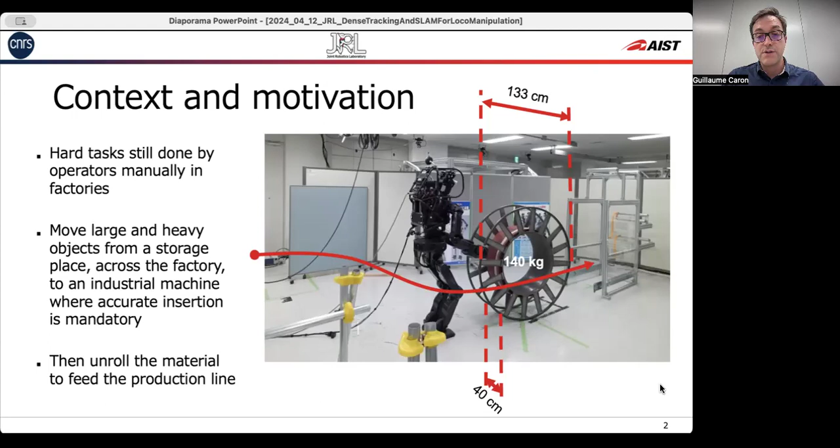It's a challenge to manipulate with the humanoid robot chosen here because of its similar shape to the human operator in today's factory. The goal is, after moving this big object in the factory, to insert it in the industrial machine, which is more or less the same width as the object. That's why accuracy is important.

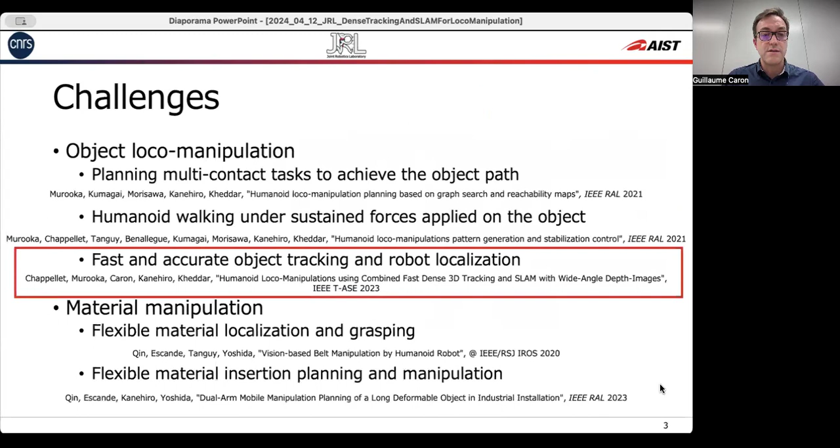There are many challenges to achieve these tasks in the two parts of loco-manipulation and material manipulation. Our group made several contributions to these issues, and today I'm focusing on the fast and accurate object tracking and the robot localization issues.

First, we chose a recent sensor, the Azure Kinect camera, which offers a wide-angle depth camera with 120 degree field of view. This camera is set in the head of our humanoid robot, and the data captured is used for both 3D model-based tracking using the dense depth map, and its interplay with SLAM for localization and mapping, using both color and depth information.

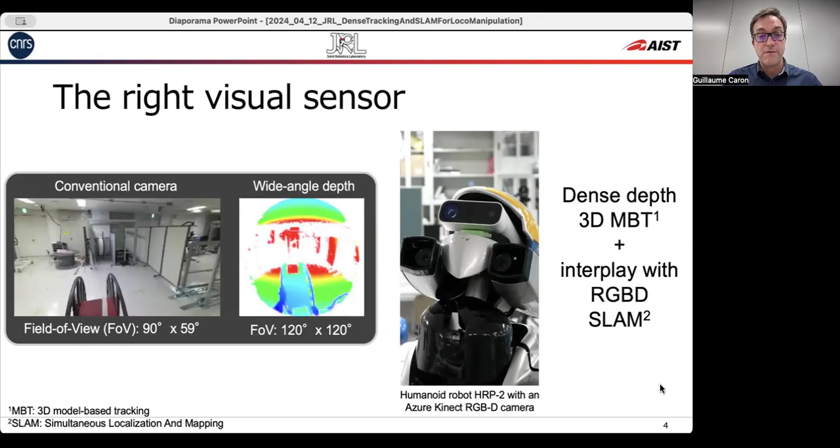The 3D model-based tracking aligns the 3D model of the object to manipulate with the depth map captured by the camera. This is done by solving an optimization problem that minimizes the error between the two types of data.

It is done in a multi-scale approach, and at each iteration there are three stages. First, the 3D model is projected onto the same plane as the depth map to do dense point association. From these correspondences, we compute the rotation and translation between the 3D model and the camera. At convergence, the alignment between the 3D model and the captured depth map is ideal.

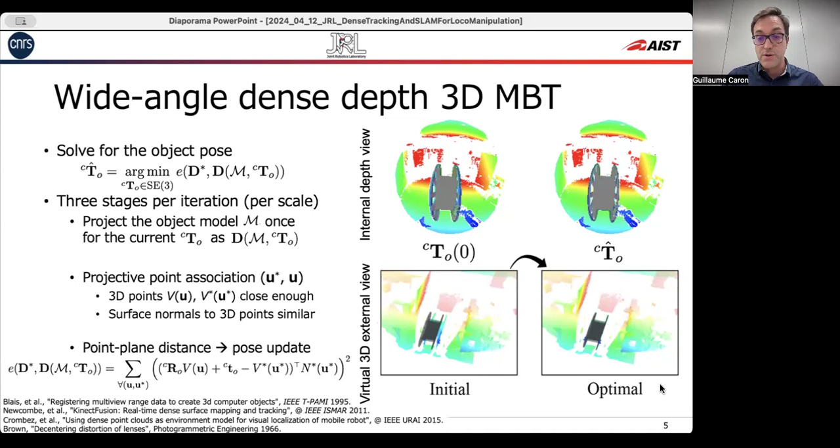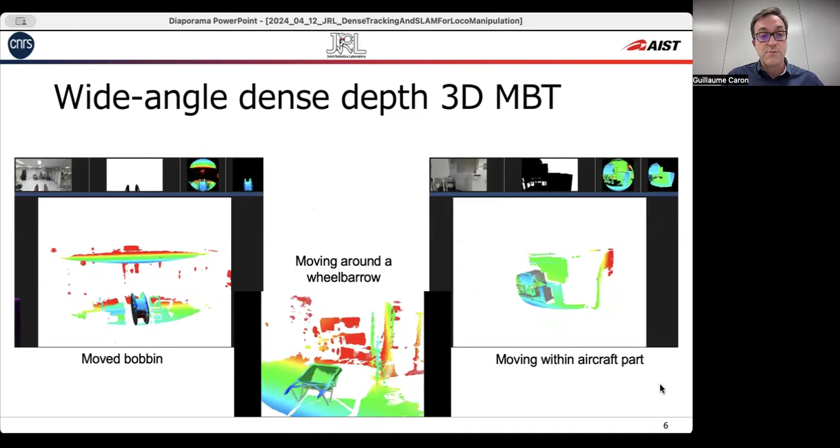It works well for the object I mentioned, the bobbin, but we also applied it to other objects like a wheelbarrow at the center, not only moving the camera around the object but inside it as well, as we can see on the right, where we move the camera inside the mock-up of part of an aircraft.

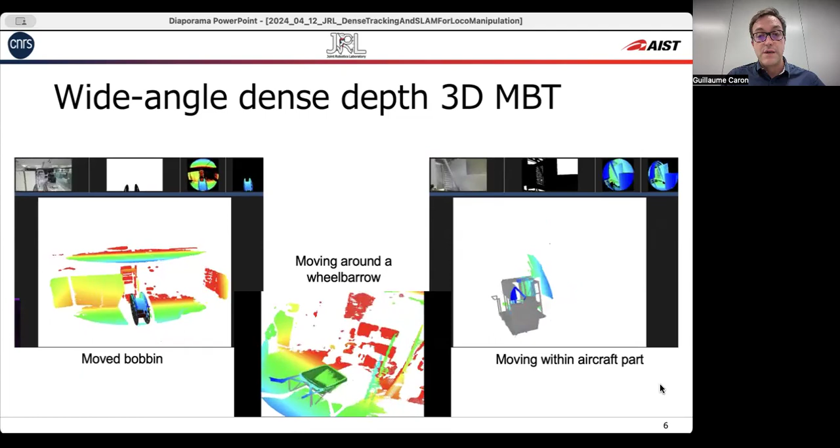Once the tracking succeeds, the goal is to know where the object under manipulation is in the factory, or at least with respect to the industrial machine, which can be distant. The 3D model of this industrial machine is previously aligned to a dense map computed before manipulation, and this alignment is done by iterative closest point.

It allows us to transform the sequence of waypoints, enabling insertion of the object into the machine within the dense map. Then we can run the localization while the robot is manipulating the object toward inserting it in the machine.

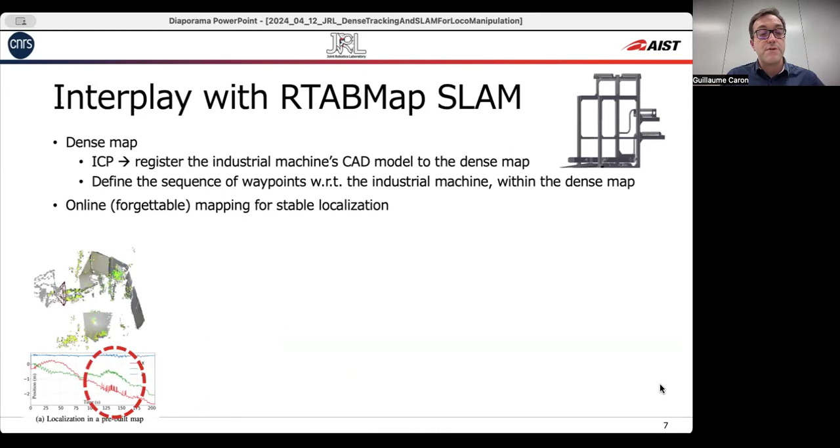But if we don't do online mapping, even with a previously built map, we may observe instability when the camera is between two poses of the pose graph of the map. If we apply online mapping roughly, instability is not observed, but we will have big errors because the manipulated object is added to the map.

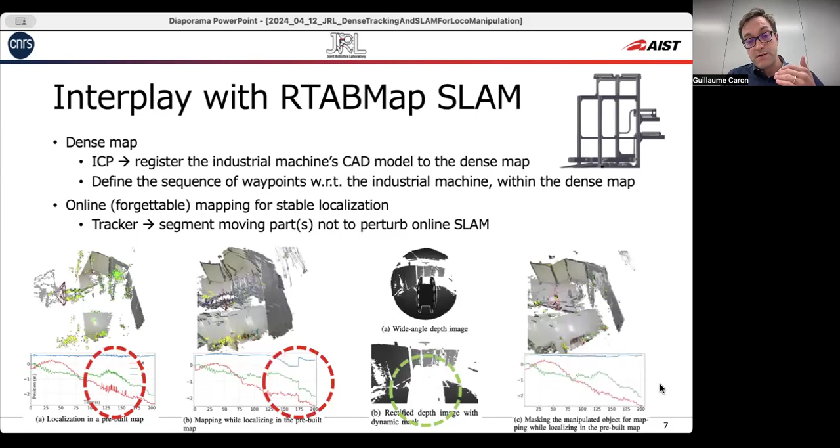The idea is to leverage the result of the tracker to remove the bobbin part, or the manipulated object part, from the data used for the SLAM, for localization and mapping. When we do this, we prevent both the instabilities of the estimation and the error.

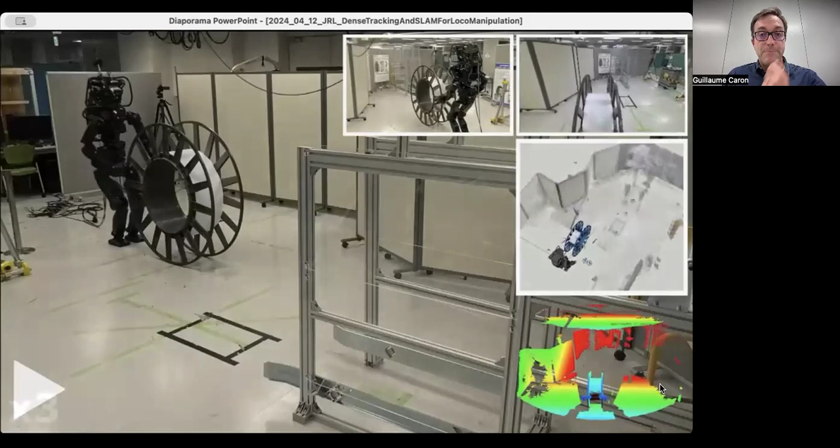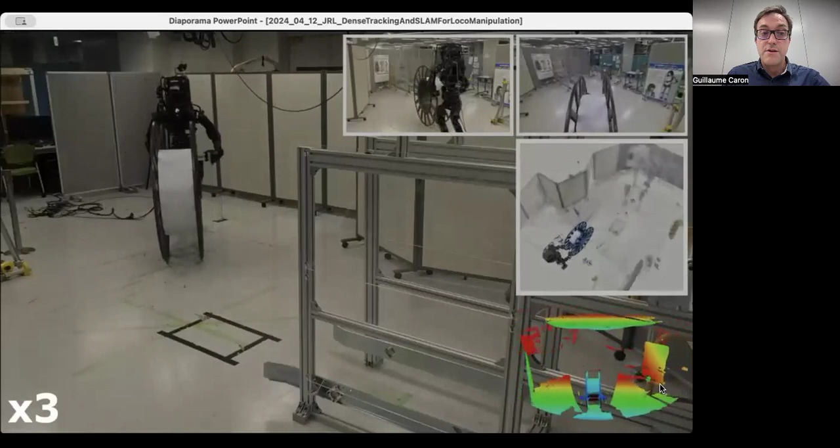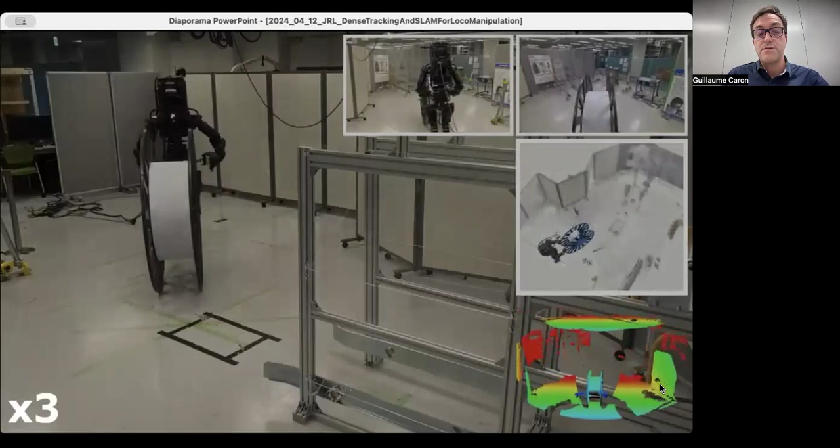We applied this on our humanoid robot, HRP5P, shown here. Top right shows the onboard views captured by the color camera in the robot's head. Middle right is a top view of the 3D map, in which the 3D model of the robot and the manipulated bobbin are shown as well.

Bottom right is the depth map captured by the Azure Kinect camera, shown as a point cloud with false colors, red being the farthest from the camera. The 3D model of the bobbin is aligned to this point cloud.

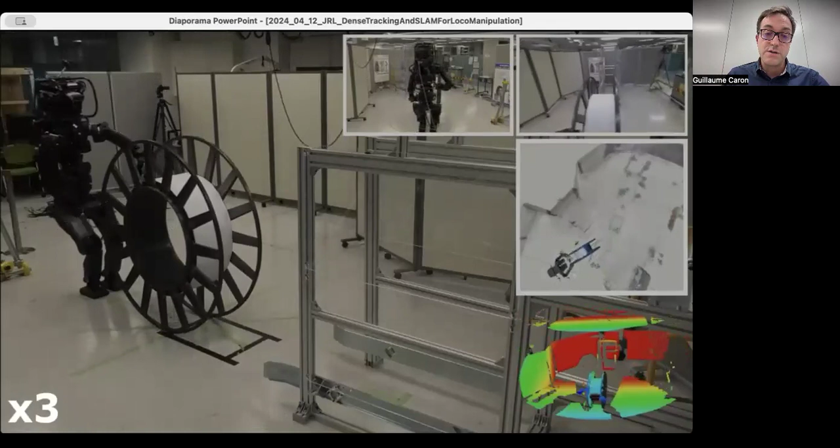You can see on the left that the robot, at the end after moving along several meters of trajectory, inserts the bobbin accurately inside the mock-up of the industrial machine.

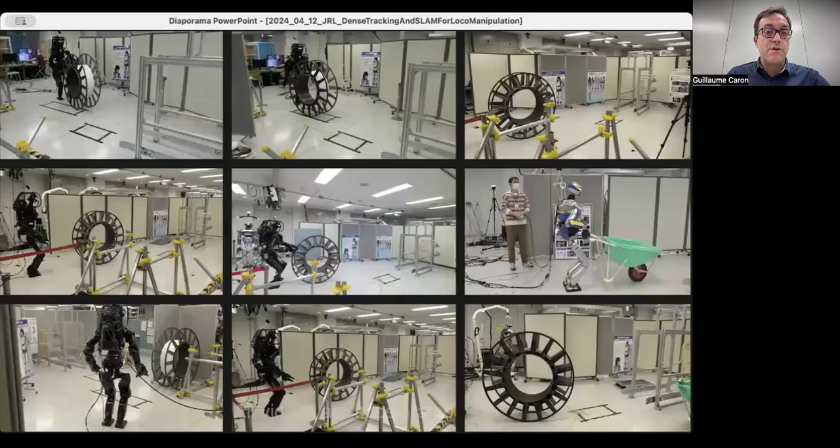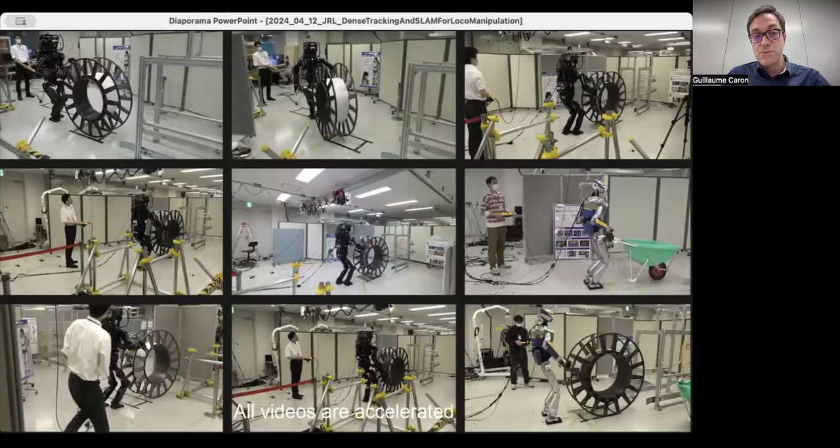We applied the same technique from different initial poses, slightly different environments, and also other objects and other robots. Moving from one robot to another, and from one object to another, was made easy thanks to our framework, MCRTC.